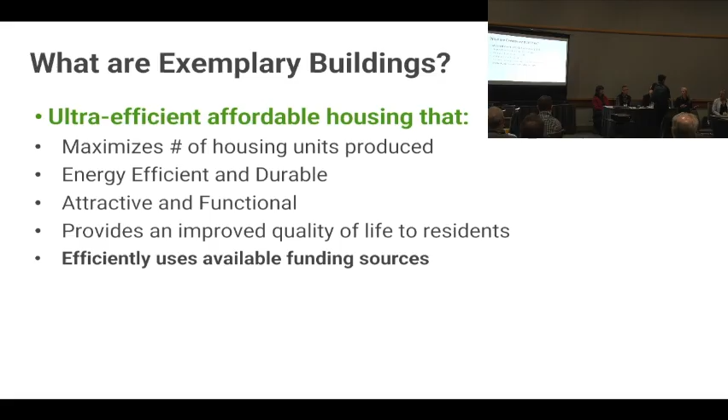Just because the funding came through, you still need to balance the timing of the funding.

So the big strategies I'll talk about - I'm sure many of you have heard this - at Walsh we have this term, cost-efficient design and construction.

I'll skip through the high-level principles since you've heard them ad nauseam, and then think about high-performance enclosures. That's the big thing we think about with energy efficiency - yes, there are new technologies and great mechanical systems, but if your envelope leaks, it doesn't matter how great your mechanical systems are.

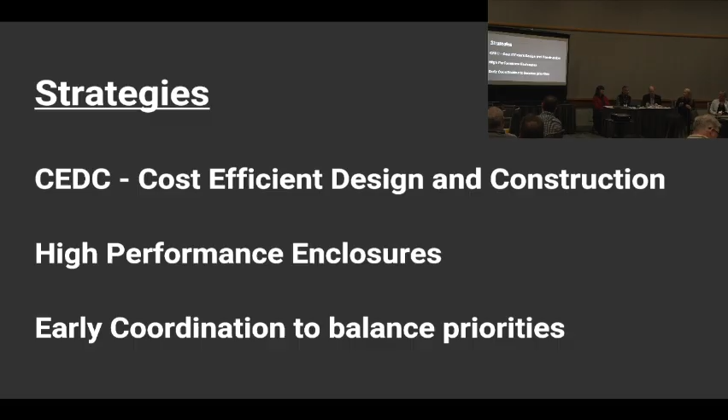You're just going to be losing it all out the holes in your building. So we spend a lot of time thinking about that, and it's relatively low cost. If you think about the break-even on really tight envelopes, it's generally low cost compared to really high mechanical systems, and the break-even is pretty short. Then there's early coordination to balance those priorities like I talked about.

So really quickly, our idea of CEDC is to think about all the different components in construction - your mechanical, electrical, framing, structural, all the finishes. Try to squeeze as much as you can out of that by being really efficient - build the same kitchen layout for your 100 units, don't have 15 different kitchen layouts.

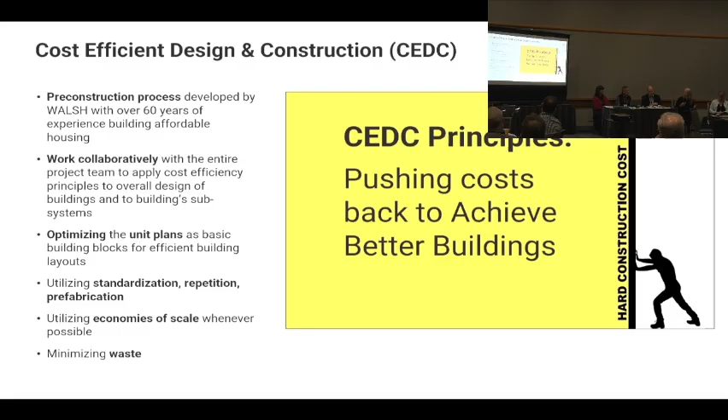Little things like that - we try to build on modules so your walls are a single 5 pieces of drywall across, not 5 and 3/4 pieces, so you don't waste energy cutting. Those types of things - minimizing waste, being really efficient in your floor plan, like building blocks, a kit of parts.

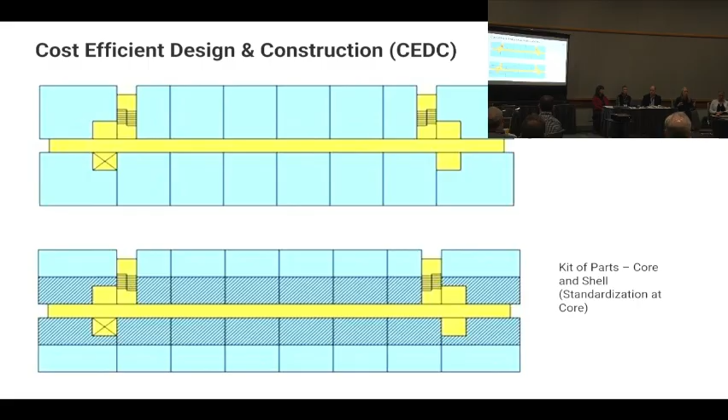What you can do is keep your core really similar, and then oscillate your exteriors - add decks, do all these things on the outside - while you've kept your building blocks and kit of parts the same. And density definitely plays a big role.

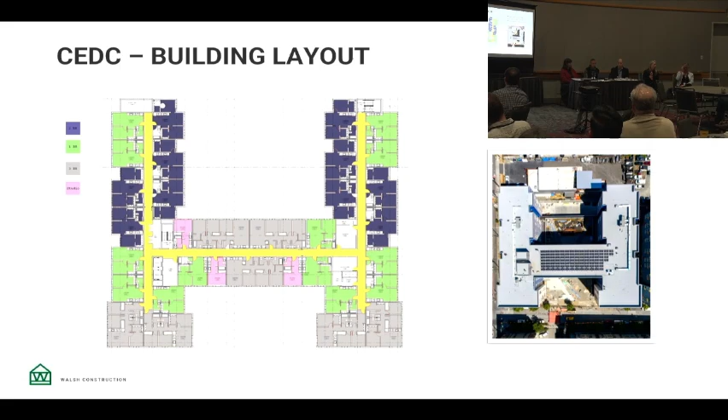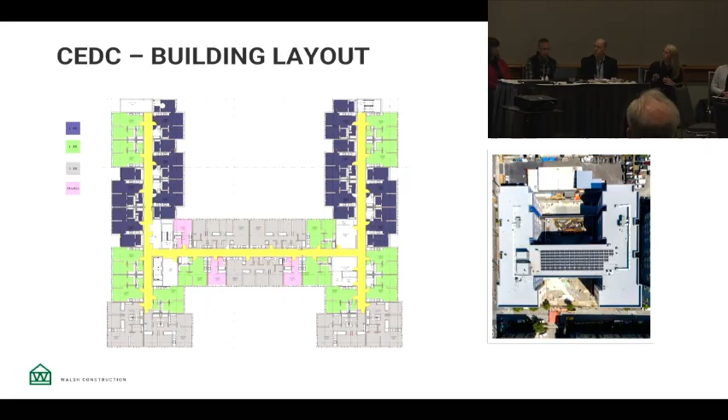This is a project example - a very efficient building, relatively low cost, not because we skimped on durability, quality, or energy efficiency, but because we built really smartly with a lot of upfront coordination and planning. That's the CEDC - just being efficient with how you think about the building blocks of the building.

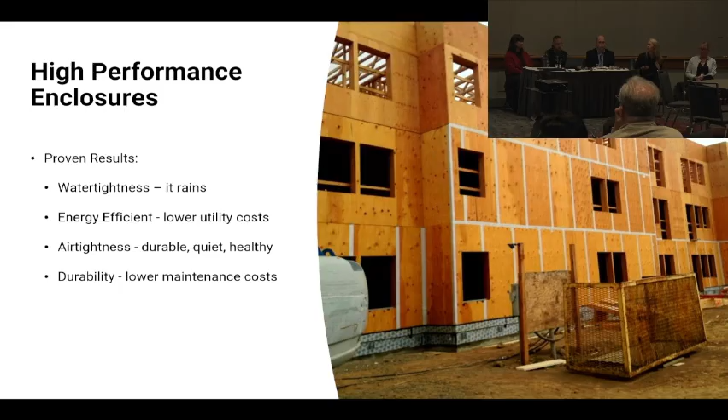And then high performance enclosures - water tightness. Obviously we live in a place that rains, so if you're thinking about long-term operating costs, we want buildings that don't leak so you don't have to spend money to fix them. Energy efficiency, lower utility costs, air tightness, overall durability.

But now we spend a lot of time upfront really thinking about where our air barrier is, where waterproofing layers are, where our vapor barriers are, and understanding the building science about how buildings breathe or don't breathe is really critical.

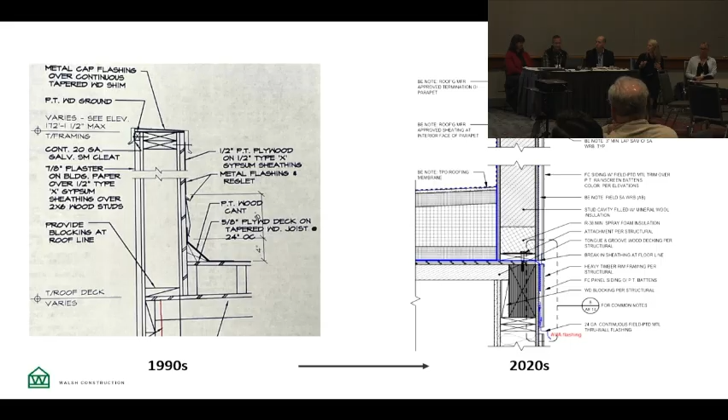What happens if water does get in, how can it get out, that type of thing. I just thought that was interesting to show that there's been a lot of evolution in building science envelopes.

So what that looks like - this is one filled with insulation, which I'm sure Eric inspected all the framing at the corners and everything at one point to make sure it's perfect.

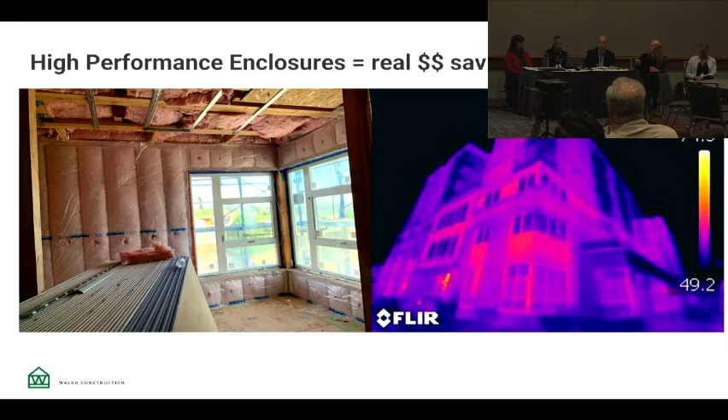So now a lot of our projects will do thermal imaging to say, hey, are there any holes, where are they. I like this example - that's a very, very tight, efficient building that isn't losing dollars out the window or out the vents. I should have had a picture of one from the 1990s to show what that looked like.

Also, why retrofit? Our preservation dollars are very valuable because we can do a lot in the envelope on our preservation projects.

So finally, I'll talk about early coordination. This is a project called the Bury Building, which we did with Northwest Housing Alternatives several years ago. We've actually talked about this project on many panels over the years, I think last year at Housing Oregon - but it was a really amazing project because we implemented those CEDC principles. We had really early coordination, and the team came up with what are the goals of the project. They sat down, they had like a manifesto.

And then they revisited those goals at every quarterly pace or so - okay, are all the decisions we're making going to achieve and meet these goals? Being on the same page, knowing you're all driving in the same direction, is really important, and then reinforcing those. They were really adhered to rigorously. I think someone would come in with an idea like, oh, maybe we should do this, and they'd ask, well, does that meet one of the stated goals of this project? And it's like, well, no, I guess it doesn't. So, okay, great idea, but that's not the right thing for this particular project.

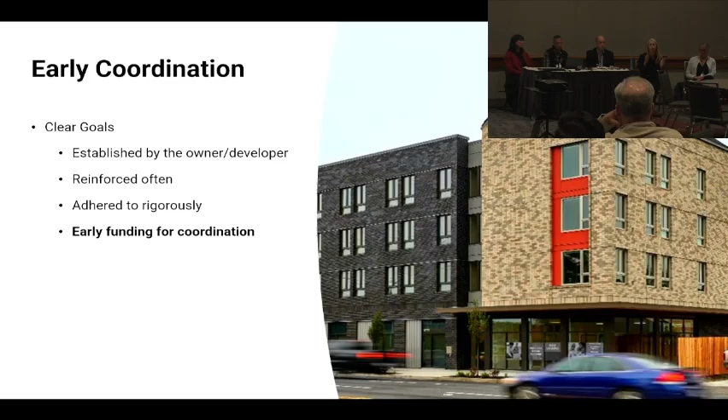And then there's that early funding coordination. As an example, I wanted to hit home on early coordination - this is a project we did up in Seattle.

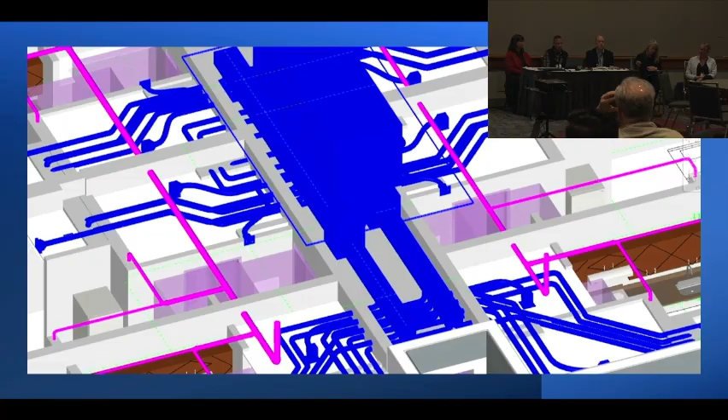You can see a lot of use of solar. They spent 6 months or more in advance of this project, even before breaking ground, knowing they were going to have solar, to make sure they could use that roof space as efficiently as possible. They actually did all this modeling of the mechanical work, the ductwork, to ensure the ductwork was underneath the roof, not on top of it. So that's what all the ductwork looked like. You could have a project like that neighboring building, where all the ductwork is on top of the roof, so there's not a lot of space for solar. Here, we spent a lot of time modeling, thinking about it - going slow to go fast, that's a term we like to use - and we were able to have a roof that looked like that instead.

So I think that's one of the most important things we see from a contractor perspective - that funding that might come in for really noble, great things like solar or different types of mechanical systems, if it doesn't come into the project at the right time, it's really not very helpful. And things can cost so much more.

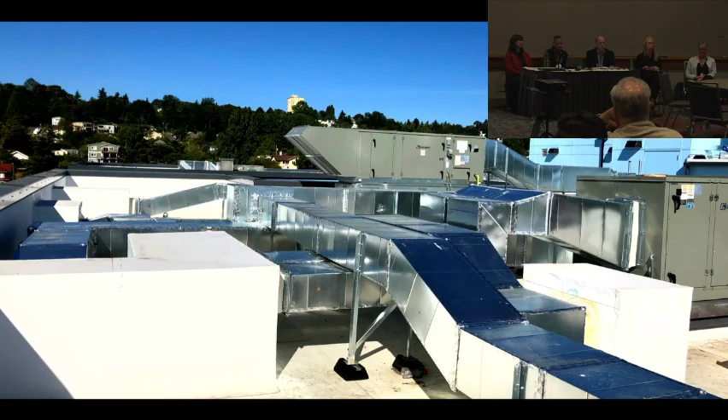Let's say we designed the project without knowing about solar, and then we're in framing, but suddenly, oh, we've got to get solar into the building. Oh, shit. Now we have to go back and do the modeling once we're already framing, then we're reframing things, probably paying our mechanical engineers to redesign the building twice. So maybe we still end up getting to a roof that looks like that, but it's going to cost us twice as much to do it.

So I think that's one of the most important things. Oftentimes we have this huge housing need, so we're trying to get units out there really quick, but maybe we pause or slow it down for 3 to 6 months to let the funding situation become clear before we continue into design - because then we know exactly what those clear objectives and goals are. If the goals change halfway through, it's going to be more expensive, guaranteed. You can minimize it, but it will be more expensive.

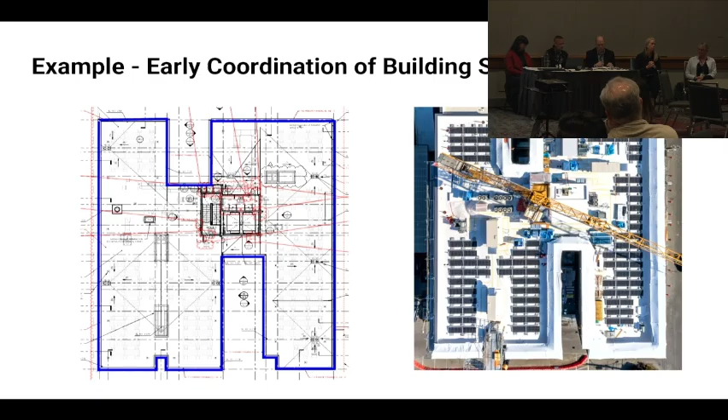So I think those are my biggest takeaways as we think about how to really utilize our efficient resources to meet this big need. And with that, a really amazing tool to help us do that is Eric.

I have a tendency to sometimes talk about stuff because there's so much information to share. So I'm just going to see if I can keep track of these things and stay on point.

So Earth Advantage, we're a local nonprofit, and our mission is to create an informed and humane real estate market. Our work includes climate friendly housing, data solutions, workforce training, and climate justice.

At least my focus today is on some elements that can help you make more informed decisions. We have unhoused individuals and affordable housing residents that are often the most vulnerable to climate disasters and economic shocks, and resiliency is protection today, stability tomorrow, and less financial burden over time.

So that starts with quality, and that's going to be a theme that I'm going to be talking about, but I'm going to be talking about quality in the aspect of time. Timing is important.

I'm also going to be now known as the fork guy because I'm going to use an example of two forks. So when given the option between a plastic fork and a metal fork, most of us recognize that between these, one is quality, reliability, and performance. We know this one's going to be that more durable, performance-driven type of choice.

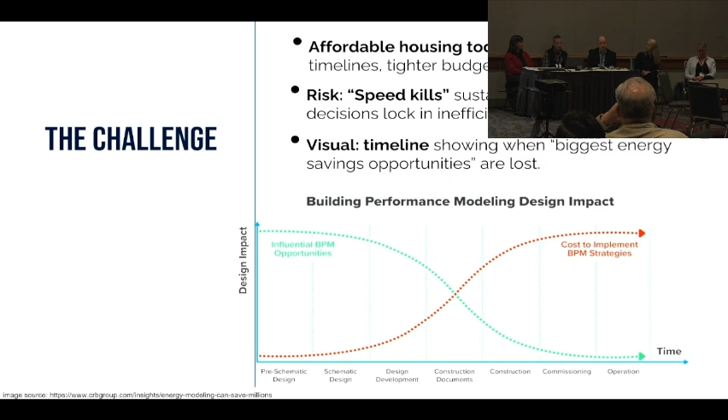So in the modeling sense of the world, if we're involved early on, to do shoebox modeling or other types of modeling, we can make the most impact to your project. If we're involved at the phase of CDs or beyond, that's when that value proposition disappears. Those changes are more cost prohibitive, and you can't get that cost savings that you're trying to aspire to. That time has kind of elapsed in that sense, and we've lost out possibly on the quality area as well.

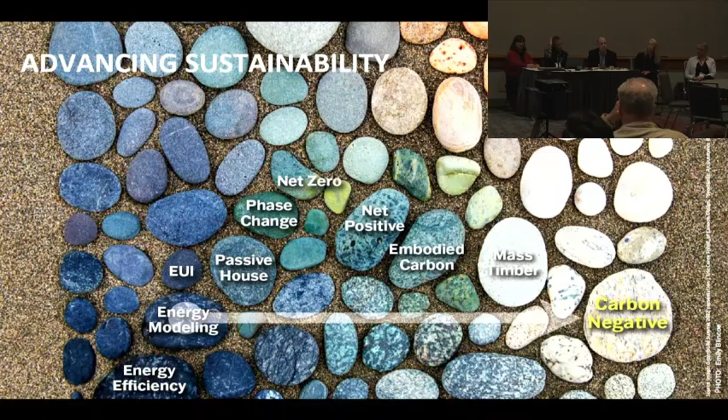And we've got a spectrum here, energy efficiency and beyond. We started with energy efficiency many years ago, and that was hammered home, but now we're working on resiliency, and we're thinking about the embodied carbon of buildings and how we can be more positive in those things. So we're moving from this consumptive-based society to regenerative. We only have so many resources available today.

And it's a balancing act, something that defies the logic. We're defying gravity. And I know that there's a lot of things that you are working through in this paradox: low cost, saving time, and quality. All those things are pulling at one another. So you have to anchor on something, usually two of those elements, in order to ensure that you can achieve that outcome. Well, my comment to you today is that you don't necessarily need to give up the cost piece where it's too cost prohibitive if you're focusing on quality and time, if you do the things in the right order and you get the right people at the table.

You change your perspective about this. Is this person looking at you straight, or are they looking to the side? Look at it a couple different ways. We need to change the way that we think about how we do the stuff we do. A lot of folks, we know we have a process. A lot of you are very experienced. You've been in the industry for a long time. We've got a way that we do stuff.

Sometimes if we shift that perspective just a little bit, we can make a bigger impact in the overall outcome of what we're trying to achieve.

Now, modeling involves various stages of the process. There are elements where we're just looking at specific systems, or we're looking at the whole building or the whole element itself.

Those include simple box modeling, which is very simplified, to looking at load calculations, to optimizing systems, or something called value engineering—but I'd think of it as life cycle benefit analysis as opposed to cost analysis—or other areas where we're really trying to narrow in on the performance of that building.

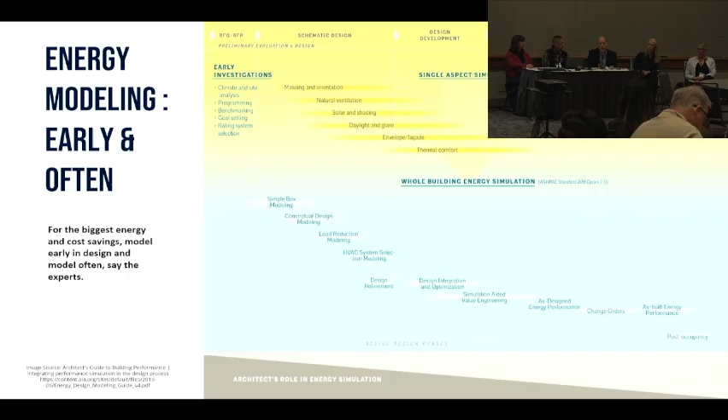Some tools available to you today—some of you have seen this, some may not have—this is something from statewide. The Zero tool, you can go online, it's free, you can put in your address, you can put in some performance metrics that you're trying to achieve.

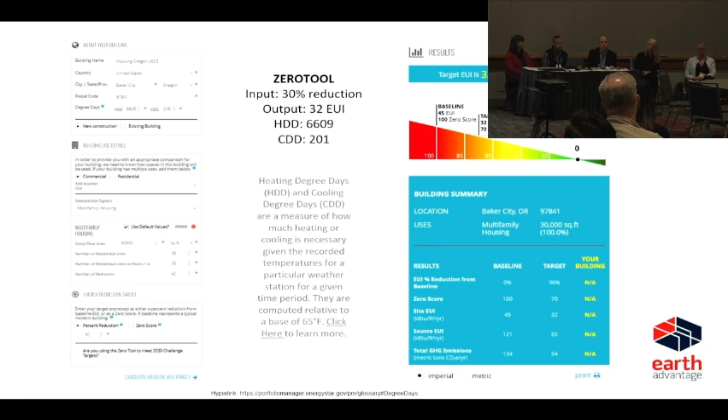It will spit out an EUI, an energy use intensity value. Just start the process of thinking about what you're trying to achieve on some of those metrics.

And then you get parties involved that are out there. I know there's a couple of quality assurance parties in the audience today that will help you with focusing in on those areas, like window wall ratio.

If you have more windows for daylighting, obviously there's value there, but it also has some costs, higher heating and cooling loads.

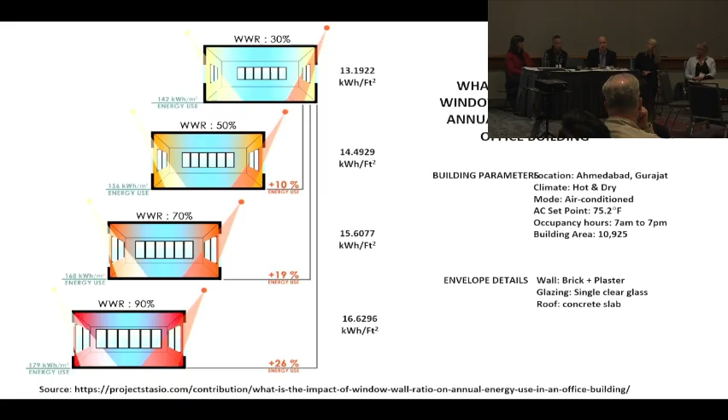And I know that there's still that element of time and cost that you're still balancing. And you also have these competing priorities—we've got all these different parties that we're trying to appease. We've got these constraints, competition, expectations, perceptions. All these things are competing with one another.

Don't forget that one element, that missing piece there—quality still needs to matter. And we need to focus on that piece of quality.

In order to do so, we need to engage parties early and often that have the skills and abilities to help inform you and your team on making informed decisions. That integrative approach involves the design, the construction, the operations, those modeling parties, the verifiers. Our involvement early in that process can really help you make more informed and better decisions.

That starts with certifications. So don't think about certifications as a checklist, but think about it as a compass and a map to get you through this process with better built performance. We work on goals, green standards, quality, and plotting that path forward.

Certifications are a way to open up some of those financial needs for debt, equity, incentives, and tax credits. Those are ways to get you through that process that you're challenged with. I know those resources are limited, but we make better informed decisions by being involved sooner and frequently.

These are just a couple things that certifications have provided as benefits. There are many more. In our process at Earth Advantage, we've been working on this for about 30 years. We have this kind of process that involves throughout the integrative elements of early design through construction, optimization, verification, and then the final delivery of your product.

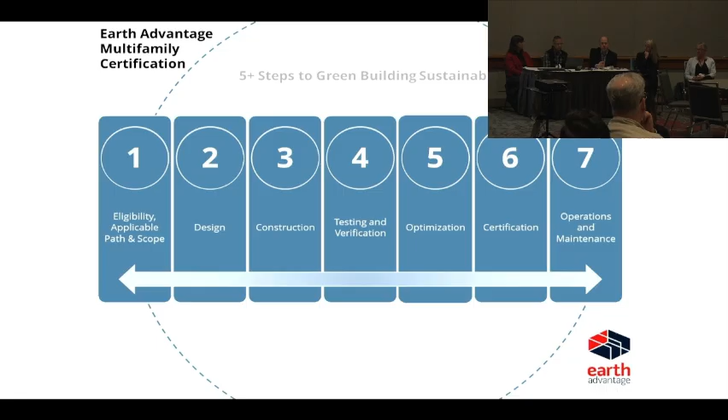So we want to make certain that along the way, we're here to help you get to those outcomes that you're trying to achieve.

I know that there's still that cost-benefit analysis you're thinking in the back of your head—well, is this going to be cost-effective? Is this going to be achievable? And I'm here to say, yes, if you get involved with us sooner than later, we will be able to not run out of time to help ensure that you're getting the best of your money and your investments.

Now remember, some things you can start today. Passive designs—there's an order that we talk about: passive first, then active, then renewables. If you follow that order of design, you're going to have better outcomes in the designs in production that you're trying to achieve. So you think about those passive designs first.

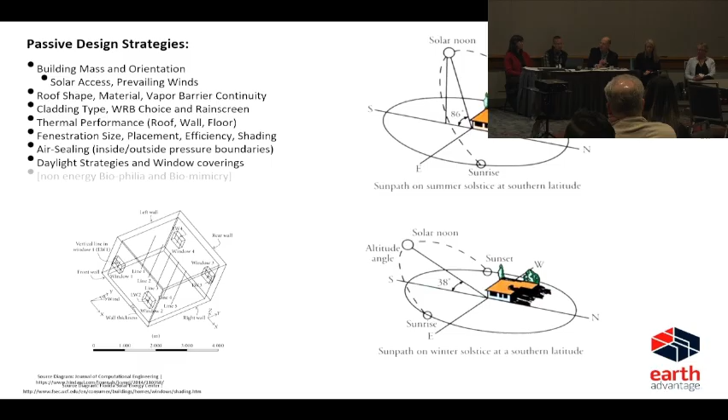Nature is a great partner—biomimicry, thinking about how those elements of passive design work, and how ants cool their spaces. We've learned some of these techniques from nature, and we're putting them into our own built environments. Those things are really great things to be able to use. They've worked over thousands of years. We should take note of those elements and continue to work on those fronts.

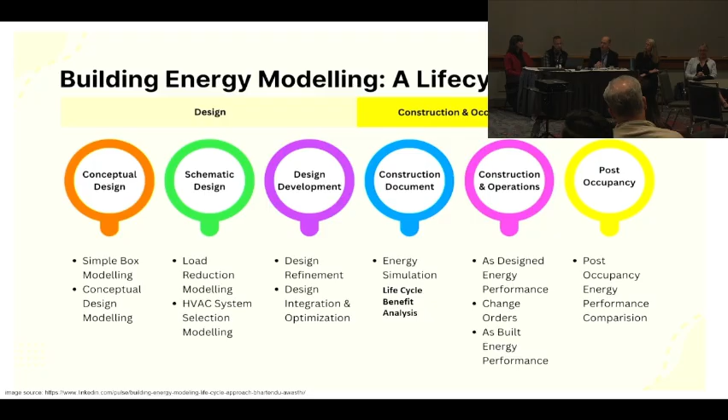I was working on a modeling project—I won't share too many details right now—but we were doing it for an adaptive reuse project. We thought that if we put in heat pumps, that was going to be the ultimate way to achieve the efficiency we were after. What we learned is that the shell upgrades, because there was a historic preservation impedance on this particular project, actually gave better outcomes than some of the heat pump technology when we put more money into the shell. We wouldn't have known that had we not done this kind of simulation on the building, to understand the dynamics of how these systems were working with one another. So that's an example where we assumed one thing because it's always been the case, but the model analysis informed us differently. I'll also mention that Eric used that information to convince the funder to fund some different work.

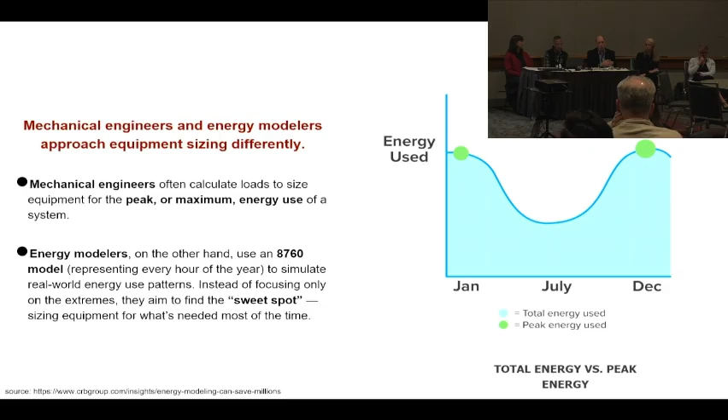For mechanical engineers—if there's anyone in the field, hopefully I'm not speaking on your behalf in ways you won't agree with—we're often looking at peak loads and how that informs design decisions, while modelers are looking at the whole picture. Unfortunately here in Portland we now have two peak loads, both winter and summer, so there are other elements in terms of resiliency metrics we might think about, like load shifting, to address those. Generally speaking, the types of equipment you choose will help inform decisions like not oversizing equipment, and account for cycling, which creates a lower useful life. Equipment rated for 15 years could be cut in half if it's cycling regularly, and then you have the capital expenditure over that shortened life. So expand that horizon of view beyond just first cost, to the life of the building over time, and that will lead to better informed decisions.

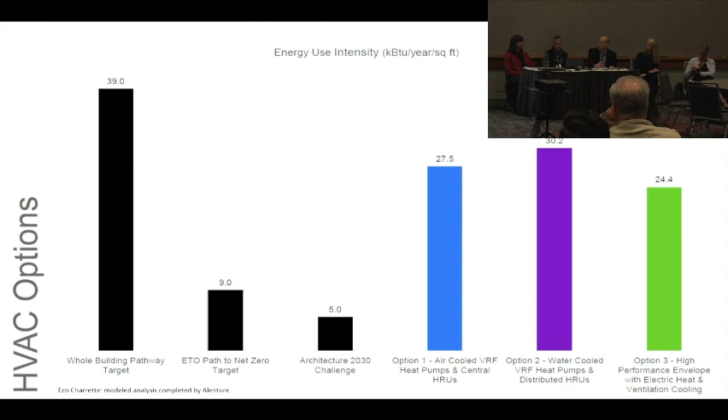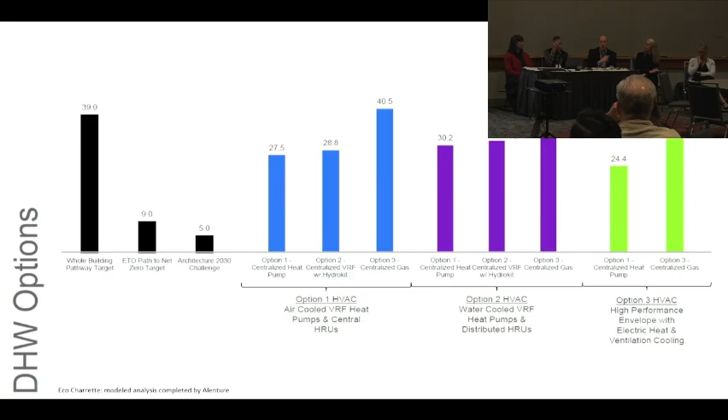Here's a modeling decision, not by Earth Advantage—we were involved as a charrette consultant on a specific building that we helped certify. This project looked at a couple of different options to inform what would be the best choice economically and for efficiency, and what happens if we add in a 264 kW system that brings down the EUIs. That also connected to a larger basis, looking at different initiatives like the ETO path to net zero, where the baseline efficiencies of these buildings would be, and applying that modeling to see what would happen if we used that approach.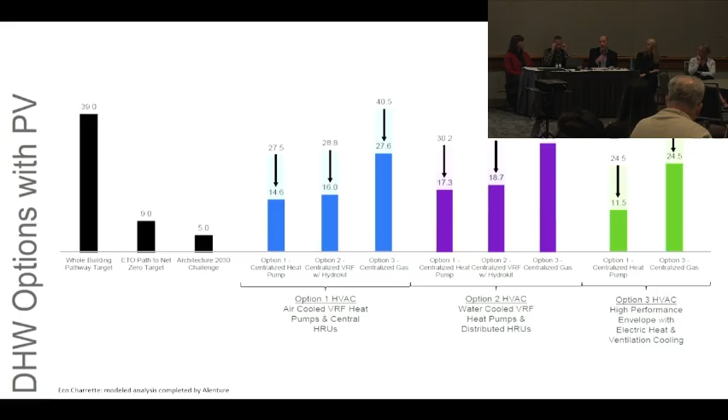So modeling can also be used to size your equipment—for load sizing in common areas and residential spaces, ensuring utilities are offset so that the burden on affordable housing is reduced. A lot of homelessness occurs because utilities are too costly, and people end up in a houseless situation because they couldn't afford those operating costs. So these are ways for us to analyze those types of things and provide better informed decisions, which also opens up doors for funding and so forth.

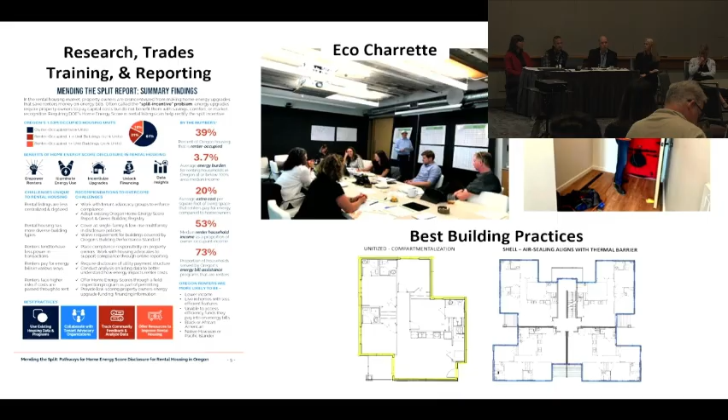Earth Advantage is involved in lots of different things, from early designs and charrettes, to reviewing drawings and showing where pressure boundaries might exist, to doing verification during construction for certification compliance, and also publishing reports based on quantitative and qualitative analysis that are free and available to the market so people can make better decisions for themselves.

Takeaways: make certain that you get engaged with a green building professional, a modeler, and a verifier earlier rather than later. Order does matter in terms of passive, active, and then renewables. Think about the expertise to avoid those pitfalls. Certifications are to be viewed as compasses, not checklists, so that you have those values.

Here's one more focus: engage energy modeling early and often, commit to green building certifications, and invest in trusted field verification.

Here are some resources available. I'm on a technical committee for the Zero Coalition. We've published a lot of different resources that are available statewide, seven steps for both new and existing buildings to help inform you on that process.

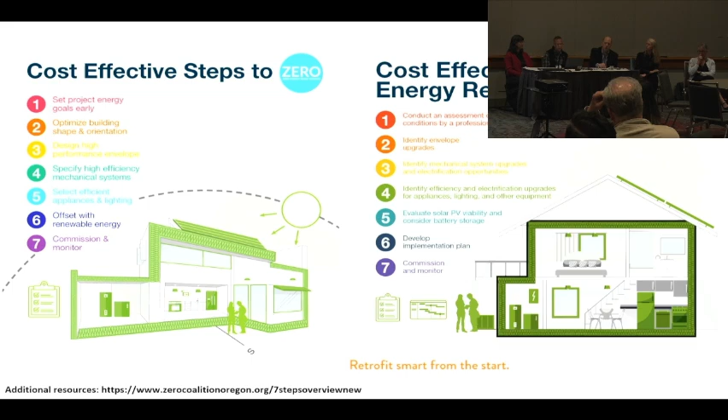And I have just run out of time, so I'm going to pass the mic to John to talk about quality assurance and verifications. I might just, from my contractor perspective, put a plug for the real effectiveness of modeling.

At least from my perspective, as we're working through target value design trying to get to a budget, there's a lot of decisions we have to make along the way. Having that modeling to say, okay, if that's one of your stated goals, we know this building has to achieve the model or whatever we're saying - so I throw it at the table, well, what about, we could change the windows to this.

We can take that information and verify it with the model. It's like, nope, we can't do that because it'll blow the model. Or, yeah, actually we could - these windows will work and we can still achieve the goals. So it's a really great decision-making tool.

Sorry, go ahead. No problem. All right, so you'll start to hear a few themes here - communication, early planning, trying different ideas - a lot of great stuff here.

But with every great story, you got to have a little bit of tension and a villain. So, hi, I'm John DeLance. I'm with Evergreen, and I am a quality assurance provider for the PCEF multifamily and commercial programs.

And I know what you're thinking - I saw everybody tense up a little bit when they heard third-party qualification there. Yeah, so we're seen as the villain, the person you don't answer calls from. You forget to invite us along on the site visits when you're going out to the project. You wait until the project is completely done and tenants are moving in before you call me and say, hey, we're ready to be checked out. And then when I come along and find something that's wrong, I become the bad guy.

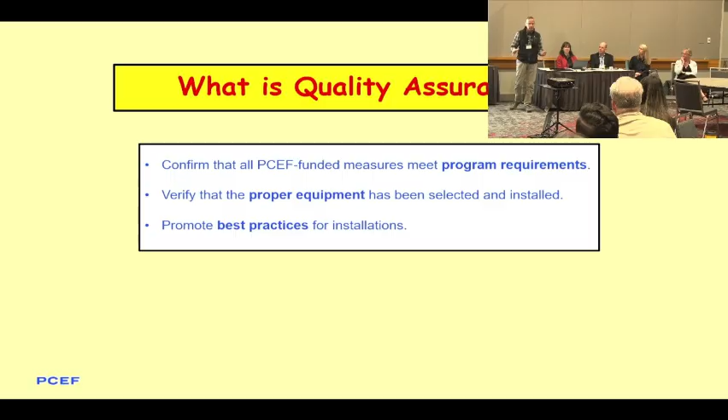Bottom line, that's my goal with it. There's a lot of things involved with that, but that's where my focus is. Nothing that I should be asking from you should ever be a surprise or something out of the ordinary. I'm not asking for a special report or anything like that. I'm asking for scopes of work - you should know your scope of work.

Load calculation - show me that the HVAC equipment you're calling for is sized properly for the project you're working on, things like that. It should be things you've already got in your folder or are planning for. And again, no surprises.

Why does it matter? So obviously you want to get paid, so you want me to pass things. But it goes beyond that - we're looking to get the best performance, lowest operating costs, and most comfort for the tenants and occupants of the projects.

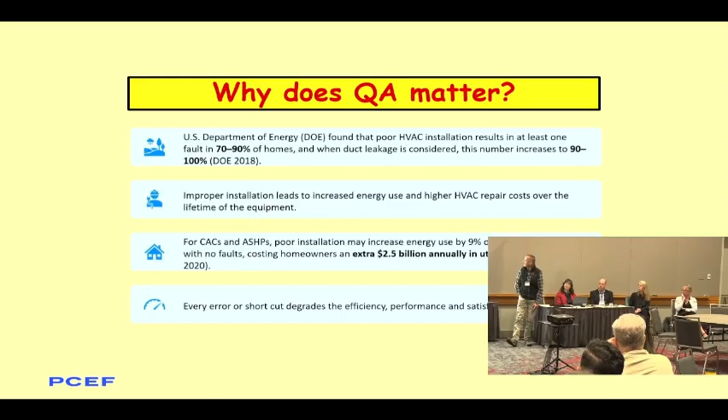The U.S. Department of Energy did a study and found that over 70% of HVAC installations had at least one fault. And when you added the ductwork into that, it became almost 100%. Those improper installations lead to increases in operating costs, overall maintenance of the equipment, and comfort issues - so it affects those things.

Every error, every shortcut degrades the efficiency, performance, and satisfaction of the measure. So it's important to make sure that we're doing this right to get the most performance out of that equipment, making it as efficient as possible.

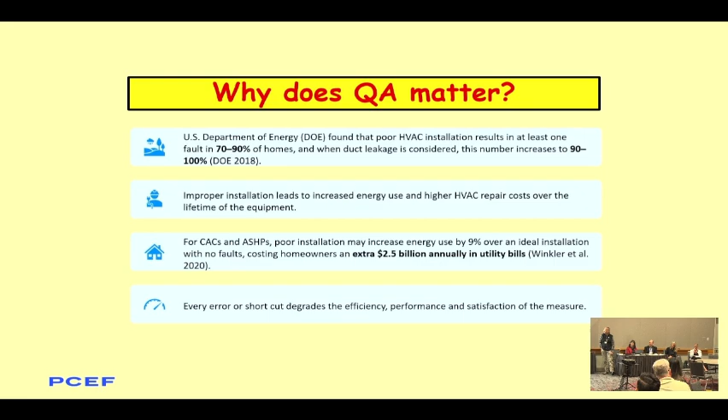So we can do it the hard way, or we can do it the easy way. I'm not here to trip you up. I'm not here to save the city money by failing you so they don't have to pay out. We want you to do good work. We want to give you that money and do these things.

But it's difficult, it's mentioned a couple times here. If you're not planning ahead, it causes delays down the line, surprises. We don't want the surprises. So communication is the key. We found that the earlier I come into the process, the more we are able to solve those problems when they're just in the theoretical stage, rather than when things are already installed.

So you have to come back and replace things. I'm here to help, and here's a list of the services, some of the things that we do above and beyond what you think of as quality assurance. That first one there, pre-application reviews, is something new we've been working on, and it's been hugely successful.

If you're considering going after a grant for one of your projects, you can schedule an appointment, and we'll come out and do a site walk with you and talk about what your goals are, what kinds of things you're looking to accomplish, and point out some things you might not have thought of. In terms of measures that qualify that you might not have been aware of, or maybe you're going in a direction that the funding won't cover. So making sure it fits within those eligible measures.

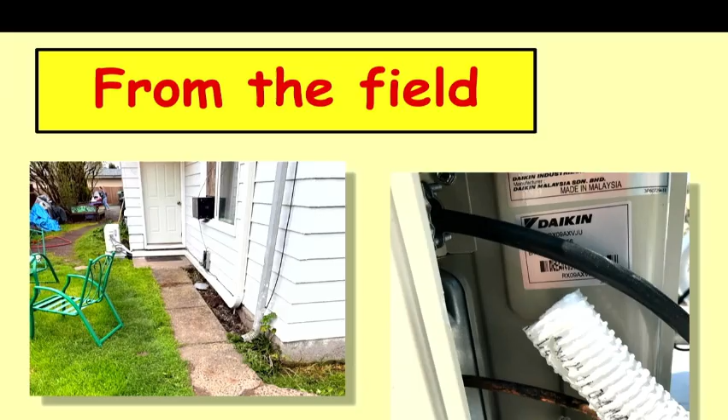You've got it running under the front window here, so kids are going to climb up on that and use it as a step to look in and see when it's time for dinner. If we were in early, a couple questions I would be asking is, is it possible to move that unit right over here instead?

Another possibility would be, what about taking it up and around the soffit to get it off the ground, so it's not vulnerable. In some cases there isn't a good solution. We've had a couple where it wasn't ideal, but the only way you could get them in was to do that. But at least have that conversation on the early side so it's not a problem. It's something you can work out.

I had the opportunity to be brought into the OAC team, owner-architect-contractor team, very early in a project I was working on, and for the most part I sit there quietly and just listen to what they're doing. But in a couple cases they ran into some problems where the installation of the heat pumps was not going to be permitted by city requirements. So they were coming up with opportunities to work on that.

A couple times they kind of steered off, so the solution was not covered under PCEF requirements. So I was able to steer them back before that conversation went too long, and they wasted a lot of time planning for something that wouldn't be acceptable. So bring us in early, communicate, we can help you. That's what we're here to do.

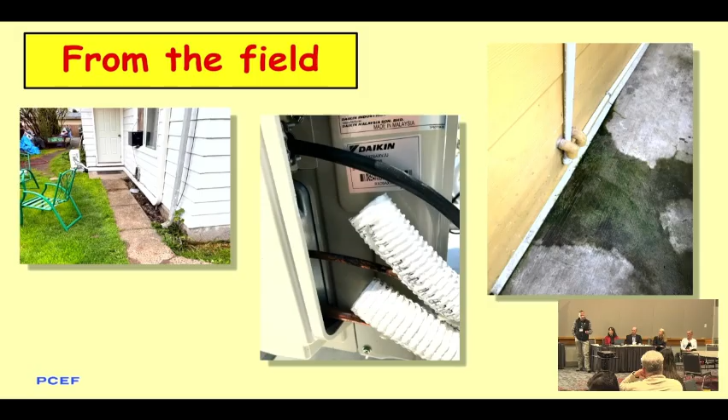So teamwork makes the dream work. Let's work together, let's work towards doing the best work we can, providing that comfort for the tenants, and work as a team, not as, I'm not here to be your villain. So with that, I will pass it over. I think we're back to Q&A.

Yeah, thank you so much, John. John has been... there's one more slide that somehow didn't make it on here.

John and Evergreen, both Evergreen and Earth Advantage, are contractor quality assurance providers for PCEF, and they have been great partners in developing our approach to quality assurance. And I think what we've always said to them is, you're not here to fail projects, you're here to make projects work. If it doesn't work and the project doesn't get done at the end of the day, it's kind of on you. So figure it out.

One of the things that is standard in our quality assurance process is early scope review. So our quality assurance providers look at a scope before anyone breaks ground or PCEF pays out any dollars, and they're able to make these recommendations earlier. They're able to kind of be like, oh, if you're going to do this, think about this. Think about where your line sets are going to go, and getting them out on site early is really, really helpful as well. So yeah, it seems simple, but somehow it doesn't happen.